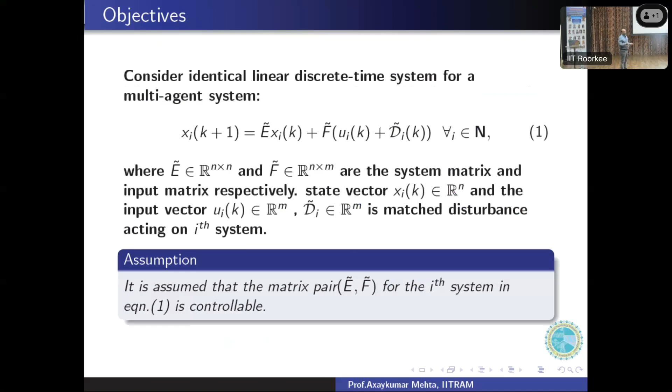So you can see in the discrete domain, x(k) is nothing but x1, x2, up to xN. These are state vectors of the individual systems. So if you have N number of agents, then small n cross capital N number of state variables you will have. So let's say my identical system is second order and I have 4 agents, so I'll have 2 into 4, 8 state variables. Accordingly, my control inputs will be U1, U2, U3, up to UN.

So capital N number of agents are there, and these controllers will be deployed on each agent, and that is why it is called distributed discrete time. You need not put it in a centralized way, because, like birds, all agents are distributed. You have to deploy your control algorithm on each agent. This is how we started with the system. Then we define the consensus error. This is also well known.

And from this consensus error, here it is, this is the error. This ai0 is called the pinning gain, and that is the difference between the leader and the first agent which is in connection. While this error, xi minus xj, represents the state information between the ith agent and jth agent. So only the neighbor agents of the leader will have the information of the leader, not the last one. So based on this, we define the consensus error.

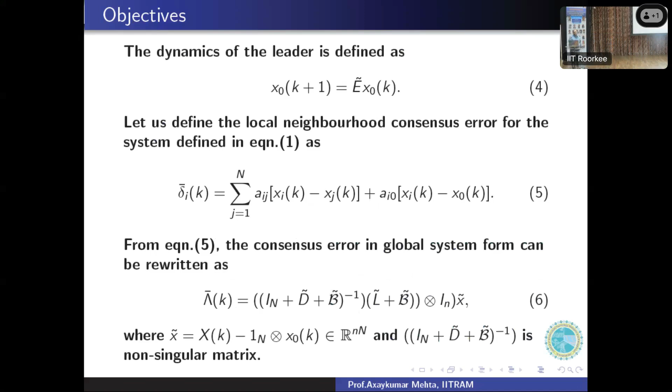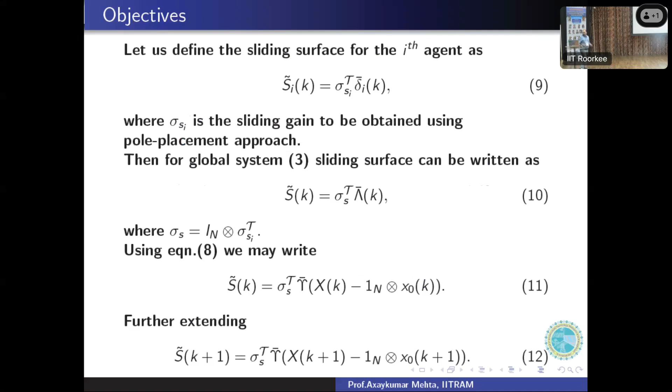And based on this consensus error, we design the first sliding surface, because in sliding mode control, two things you have to do. Number one, you have to design a sliding surface, and second is the nonlinear control. So we designed the topological sliding surface, and that comes out to be equation number 11. Further, for analysis, we extend it to the k plus 1 instant, and we defined S tilde k plus 1 in this form. So this is my multi-agent system, where S is the surface of all agents in a topological form.

So based on this, we have written the Gao reaching law. This is for the individual system, and this is for your global system, which is a system of systems. Here tau will be the sampling time; tau 1, tau 2, tau 3 may be different, but since we have considered a homogeneous system, our sampling time tau will be the same. That is the initial consideration. And these are the gains. Since these are homogeneous systems, our gains will also be kept the same initially.

And based on that, we designed the first control law. We call it simply the topological discrete sliding mode protocol, using graph theory. And in the literature, we are the first who have presented this kind of control law using graph theory. So we tried to simulate this, of course, and because this is a very basic result, we had just started our research, we took a very simple system.

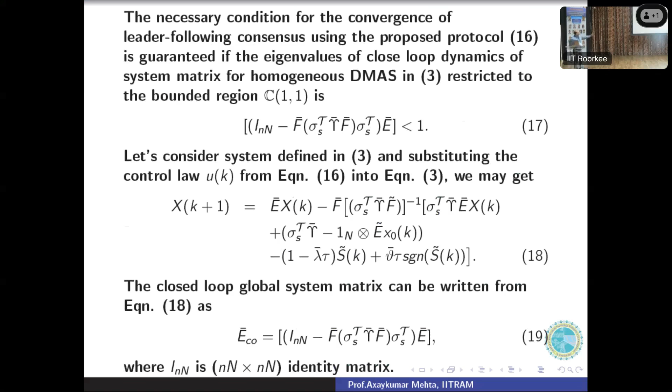I'll not go into more details of all the mathematical analysis. We have to see what is necessary for convergence. So we derived that all the eigenvalues should lie in the circle. We have taken the dynamics of x(k+1) using the control law, and we derived the condition that all the eigenvalues of the multi-agent system should lie inside a unit circle. So I'll not go into those details, but we proved it, and these conditions are available in the literature.

At the same time, we have to also prove the stability. So in this multi-agent system, we have to prove the global stability, not local individual agent stability. And we use the Lyapunov concept for this also. And we come out with this theorem that if this condition is satisfied, this is the surface of the global system, then your G should be positive.

This G should be always positive. Then only your system will remain stable. That will be a global system. And there is a proof also; I'll not go into that. So we took a small simulation. We have taken the second order system.

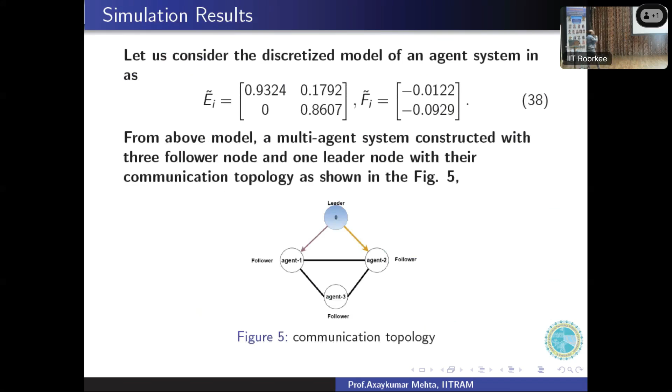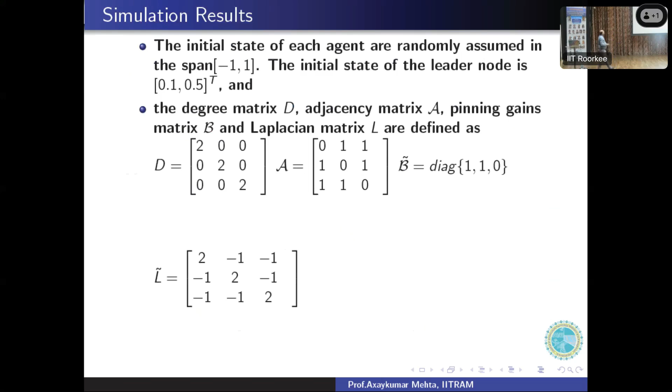And you can see we have taken one leader and these followers: agent 1, agent 2, agent 3. This is our communication topology. And we applied the control law which we derived. But before that, we have to define the D matrix, A matrix, and Laplacian matrix, which we derived from the communication graph itself. And this is the sliding gain which we have considered for the system, and we have given some disturbance so that we can check the robustness.

So here you can see the blue one is the leader and others are followers. We have taken some initial condition for each agent. Even for the leader we have taken some condition, and leader dynamics is there. And you can see asymptotically all followers are following the leader. So we can say it's in consensus.

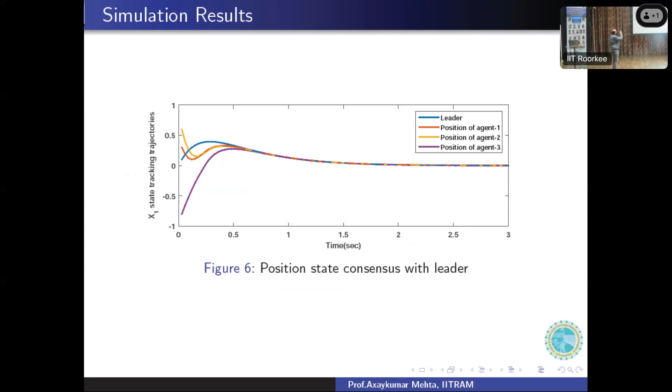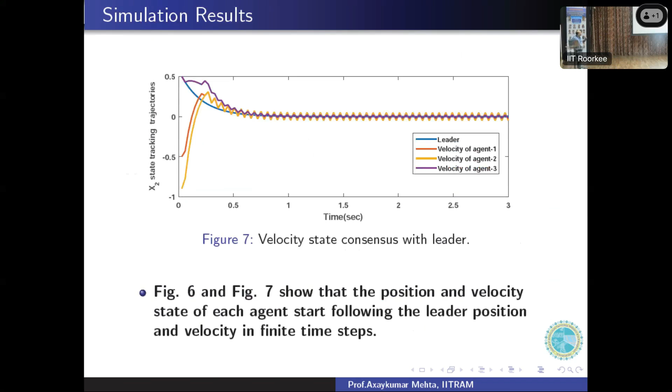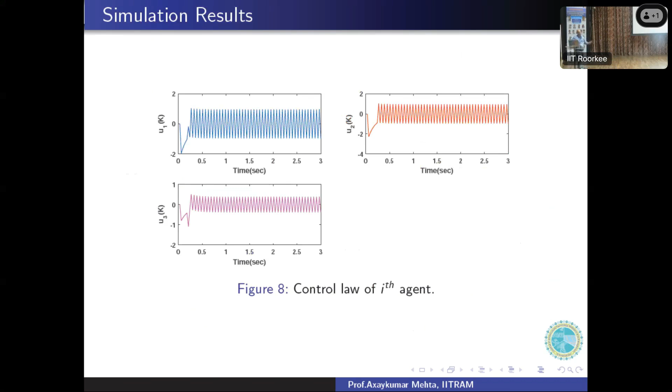And this is about velocity, because we have two state variables, position and velocity. So in velocity you can see there is some chattering, but it is synchronized with the leader. And this is about the control law on the ith agent. So on each agent where we have deployed the controller, U1, U2 and U3, you can see there is a switching as per the Gao switching law, and there is a sliding surface also.

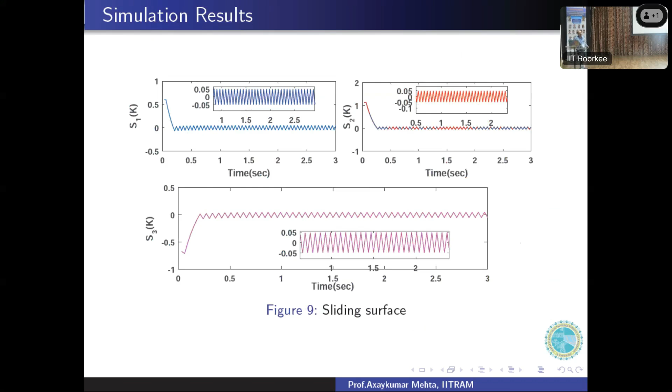So this is the sliding surface, and actually we are getting the same results we expected from the mathematical derivation. I'll not go into more detail of this, but it is synchronizing. So these are some results. So initially we concluded that we have designed a novel topological discrete sliding mode control, and we analyzed its stability.

But there were questions: how much time will this take for consensus? Because you have hardly 3 followers right now. But suppose you have multiple followers, and each one has to be in consensus with the leader. Each one has to synchronize. Follower 1 will synchronize with the leader. Once it is synchronized, follower 2 will do, follower 3, follower 4. And based on your communication topology, each one brings themselves into consensus. So how much time will it take?

See, in system control, we know how much time it will take for stability, for reaching the desired position. But for consensus, how much time will it take? That derivation was still pending, and that motivated us to work further. And that's our next part: analysis of fixed time steps required for consensus of leader-following agents. In this analysis, we tried to find out how much time it will take to bring all the systems into consensus together, so the entire multi-agent system will be in consensus.

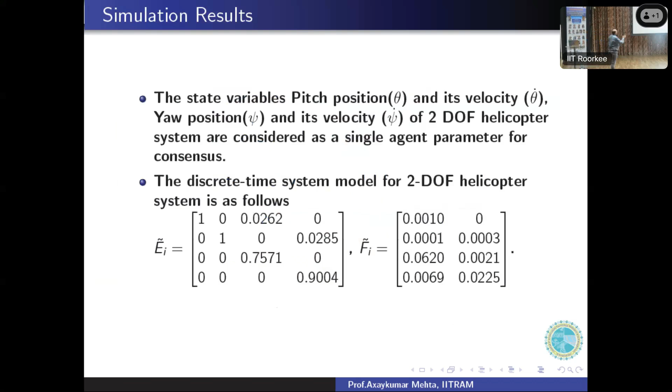So this we derived, and then instead of taking a simulation result, we have used an existing helicopter system in my laboratory. Of course the model is there, and we have used the linearized system only. So we have used this discretized model EI and FI, and since we have used the homogeneous system, we have taken the same kind of graph, but now instead of a numerical example, we have a system. So we have one helicopter as leader, and 3 are followers.

And in this helicopter system, we have to control both the pitch angle as well as the yaw angle. And we were trying to see how all 4 act. So the same approach we did: simulation, D matrix, A matrix, degree matrix, adjacency matrix, Laplacian matrix. We applied it, and we found the sliding gain also.

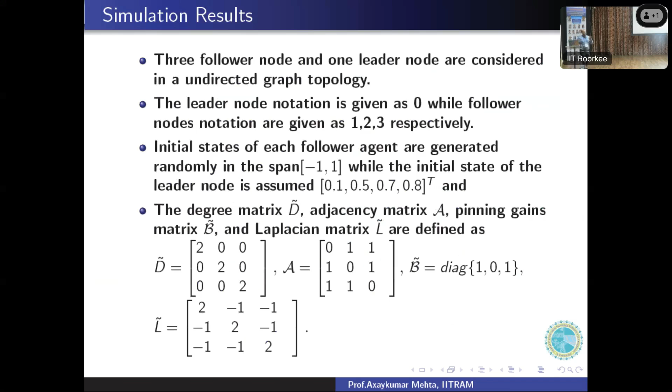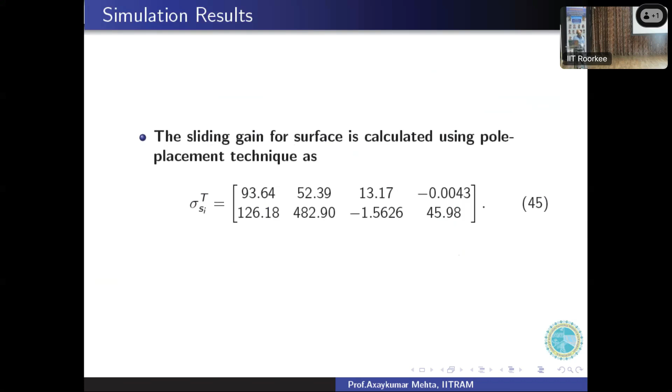And let me tell you, finding this sliding gain is not easy, because here you don't have one system. If you have one system, you can use pole placement or any cost function, and you can derive it using the LQR approach. But now you don't have one system. You have a system of systems, so you have multiple gains actually. So this is also a challenging problem, to design these sliding gains. I'll come to that. So we have given some disturbance.

Here you can see that each position is also nicely synchronized across all helicopters. So you can see all helicopters move together. The leader will go like this, so all other helicopters will also go like this. You move your helicopter in this direction, and all helicopters will move in this direction. So very beautiful results we had. Sorry, I could not bring what we applied on the system later on. So I'll skip. I'll be quicker.

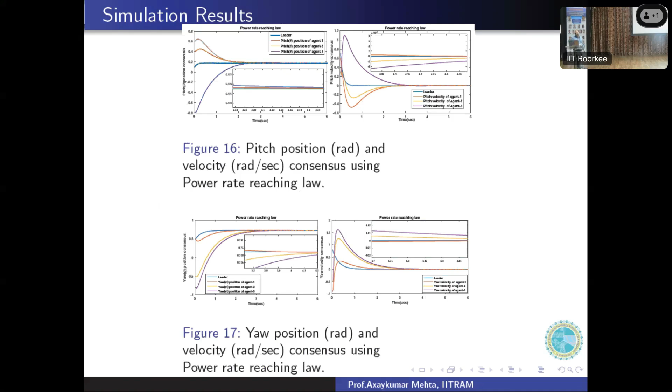So many results are there, and very important, the number of steps. You can see 134 steps are required if I am using the Gao's reaching law for position, for velocity 173, and with the power rate reaching law, you can see it has reduced. Not only that, the order of the chattering magnitude has gone down from order of tau to order of tau square. So the band has also reduced; you are on the surface itself. These are a few more results about agents. I have to go fast. So position consensus and velocity consensus.

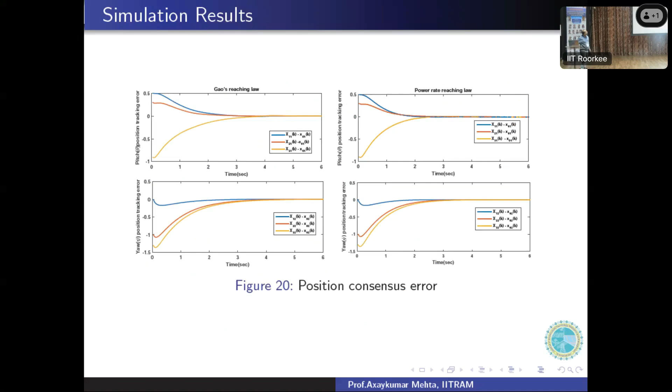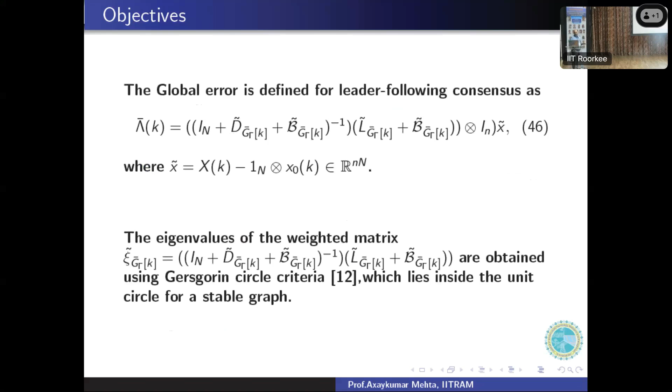Now the problem was with the switching graph topology, because right now we have used a fixed graph where agents are fixed. Now we can switch the graph, like an agent is coming in and an agent is going out. So your graph topology will change. So what we did in this case is we designed the surface and other things similarly. But the point is that your graph is changing. So we have taken 3 types of topology.

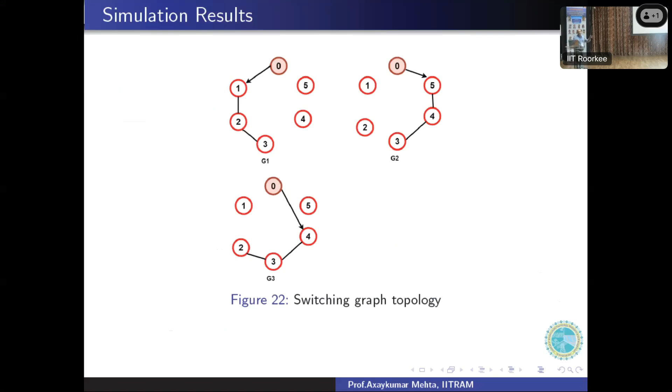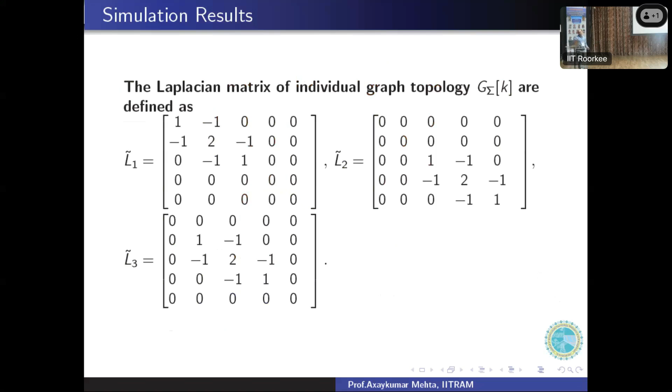You see, you have 6 agents, including the leader. In the first topology, you can see 0, 1, 2, 3 are in consensus. In the second topology, 0, 5, 4, 3 are in consensus. And in the third topology, 5 is also out of the graph. Like a bird in the initial video, a bird can enter but can go out. Now, these graphs are to be defined, G1, G2, G3, and based on that, we have to define the Laplacian matrix, adjacency matrix, and the sliding gain also. And we have got this.

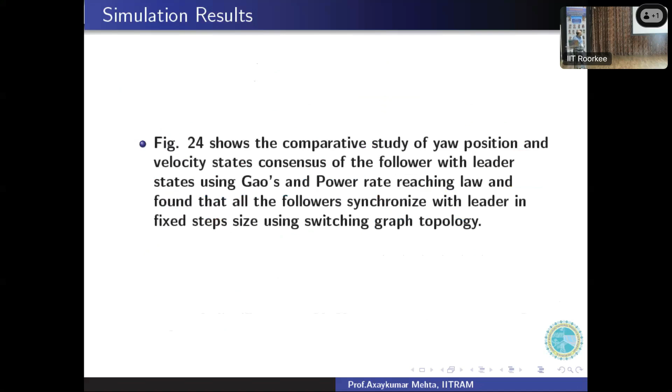The only thing is that we now have 3 graphs, G1, G2, G3, and we have changed graphs after 50 steps. So after some time, from G1, the graph G2 will come into the picture. After 50 steps, G3 will come in. So the agents will change. And how many steps will be required for consensus, that also we calculate. I'll be a little bit quicker on this. You can see that with Gao's and power rate reaching laws, we have developed this. So very beautiful results we are getting.

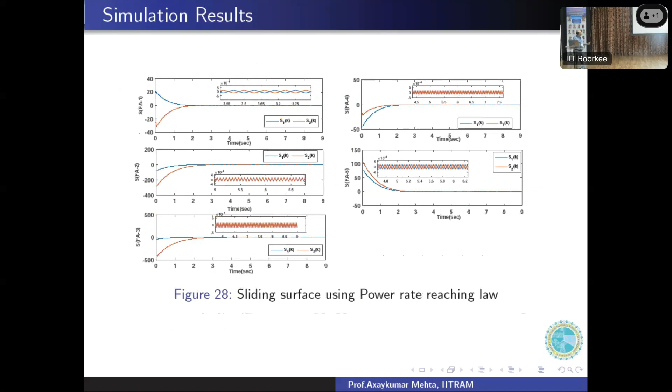Now the point is that with both the Gao's reaching law as well as the power rate reaching law there was chattering. And when there is chattering, your agent will try to chatter. This is a leader, let us say, leader bird. Even after getting into consensus, there will be chattering, and this chattering will go on and on, with all the systems. So we want to reduce this chattering, and that's why we have gone into higher order sliding mode control.

Due to the time constraint, I'll not be able to discuss more on that. But this is how we have designed the control law using the same concept of designing the higher order sliding mode. Dr. Soham has also designed a very nice higher order sliding mode control. And in fact, we have used relative degree two, but we call it higher order.

So that also we have taken for this consensus. This will be the band. I think what you have derived, same we have derived for the system of systems. We have derived for system, we have developed for system of systems. So this will be the ultimate band. I think it is similar to what you have derived in your paper. We have used the super twisting algorithm for this, and topological control law is designed.

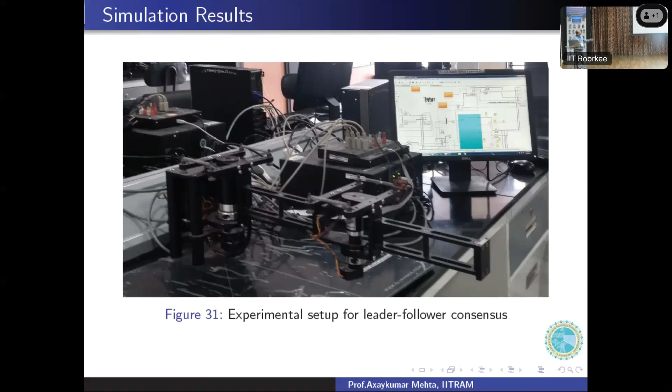And there is a lot of coupling effect and other things. And that is why the sliding mode control is important, because it takes care of all kind of uncertainties. You will see very smooth results we are getting. I am going to show you one of the results. So we have developed the algorithm for this kind of system. You can see all systems are homogeneous, but in the next phase we have taken heterogeneous arms.

All arms can synchronize. They can communicate with each other. Even we tried with changing the graph. It is not like that this is the way of graph, that leader is communicating with follower 1, 2 and 1 with 3, or like that. We change the graph also. Then we also check the result. Almost same results we are getting.

A very important thing is that, in our laboratory setup, we had only one setup, but we need multiple setups. So what we did, on different processors we put this arm model. So we had one leader, which was also virtual, and all other followers. Out of that, only one follower was the actual one. Rest all were virtual, and we tried to simulate this one. And nicely they were communicating. So I'll show you some results.

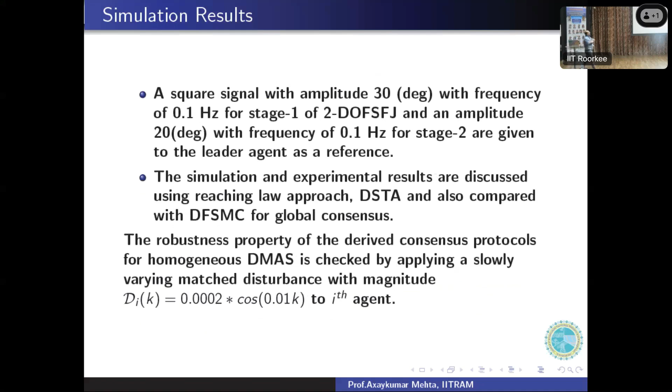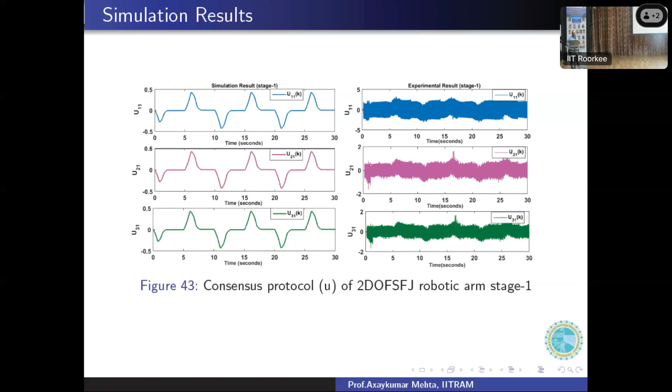You see how this robotic arm is moving, and all followers are also following. These results are there, and these are published. We have discussed about the performance also, how good performance we are getting with higher order sliding mode control with relative degree, super twisting algorithm, and we have few more, stage 1, stage 2. So we have derived performance also, and the last one, event triggered, I'll skip it.

I think event triggered is already discussed, but this also we have implemented on the robotic arm, and these are the event triggered functions we have defined, and Dr. Abhishek is there to comment on this work. So this is the control law, and the same system we have considered, and the same followers are there. You can see the consensus is there, control inputs are there to each agent, and this is the event triggering instant.

So on the left side you have simulation result, on the right side we have experimental result. So in event triggered protocol, the controller actually acts when some event occurs. That event is already defined. So these are few results. I'll not be able to. Okay, the last one is about the heterogeneous. So we have two different dynamics. As I said, in a heterogeneous system, we don't have the same identical system.

So I'll not go into that, but I'll show you the one video which I have brought. This is about heterogeneous system. You see, two arms are there, and others are virtual. Let me tell you, no chattering, very smooth. This is with the higher order sliding mode control with super twisting algorithm. So all synchronized. Now this is for only testing purpose. We have applied this to lot of guidance.

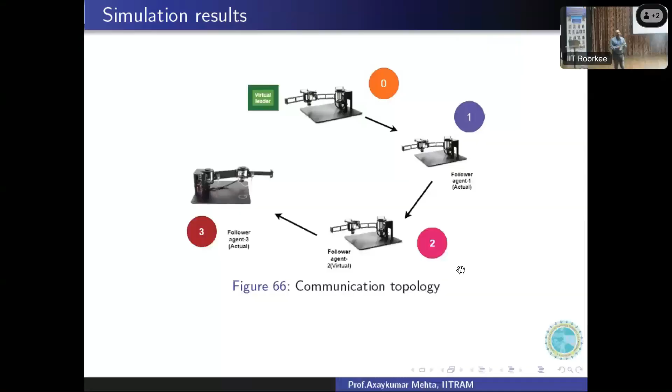As I said, consensus is one of the problems. Another problem which we have handled is formation. So we have also developed robust sliding mode protocols for formation of quadcopter swarm. So they can make any formation, whatever you want. And yesterday, I think Dr. Kiran also presented some trajectory tracking and other things. But we have gone into a swarm where they communicate with each other. And graph theory we have used. So we call it topological sliding.